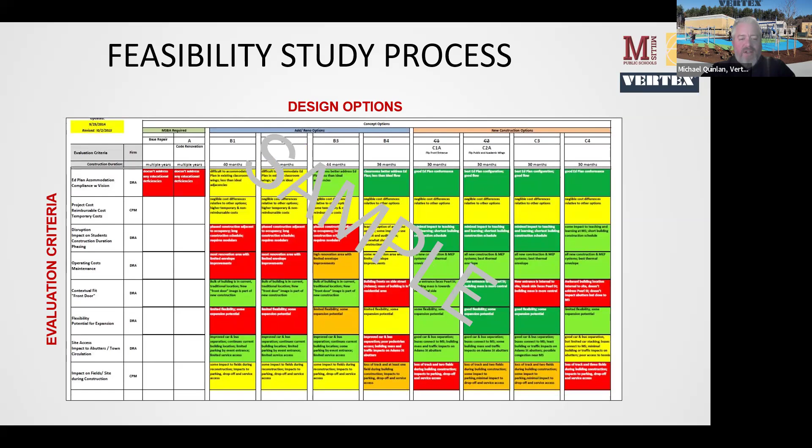We put pros and cons into each of the boxes for each option, or any notes. Then we get a feel for how you feel about it, in terms of which options work the best and which work the least for each criteria. We color code it with a stoplight approach, really sort of a 1 to 5 scale. This gives you a graphic representation, making it easy to see which options are rising to the top—green being the best, red being the most restrictive. As we go through all the criteria, you start to see which ones will really float to the top.

But these are things we're going to ask you to fill out and provide feedback on as we get through the options. Eventually we're going to eliminate options and start to reduce down. Then in the next phase, the PSR phase, is when we select one of those options as the preferred option. Next slide, Charlie.

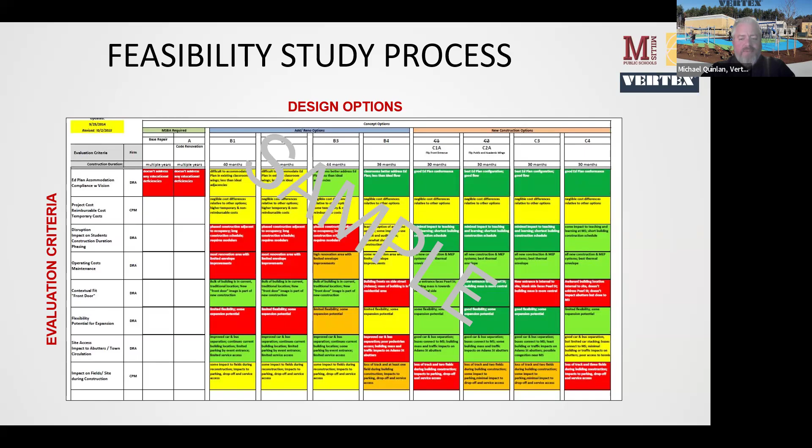The other thing I presented on at the community forum that I wanted to make sure this group was up to speed on was the MSBA process and reimbursement. We're going to get a lot of questions on this, and it's very convoluted, not simple. So we want to be as transparent and open about this as possible.

The MSBA has cost caps. There are certain things that are ineligible. There are certain things that are eligible up to a certain point, and then they hit a cap. So we want to make sure that's clear to the community, clear to the SBC, and clear to any constituent with an interest in this project.

So there are things that are categorically ineligible, like things that are not part of the core educational program, costs for items not part of the permanent building and grounds, and costs beyond the project scope. Two is the caps, which I'll get into more. And then cost for spaces that exceed guidelines, and in parentheses sometimes.

So the MSBA has a space template we've talked about briefly in the past that gives guidelines for what they expect from a typical classroom or cafeteria, and anything over that needs to be approved by MSBA staff if they're going to participate. To prove it out, you need to justify that there's an educational benefit or some operational benefit to the school to justify the added space.

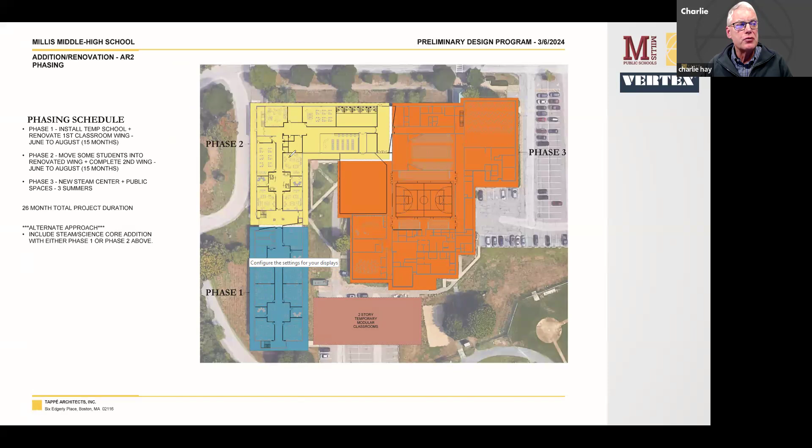Is not dissimilar to the renovation you saw at the beginning, without the temporary classrooms. And the reason for that, again, is because we're really not building any new space. The way to not have temporary classrooms is to really build a bunch of new real estate, and that new real estate we can use as temporary swing space. But when we're building a limited amount of new real estate, it's very difficult to do.

I mean, we are building this one box, but that's not going to fit the middle school, and it's not going to fit the high school. So I think we would end up in this case with some modular classrooms here. So that's the phasing for that one.

Then the next one. Quick question there. Yes, Charlie, of course. Sorry, is that a big expense, those modular classrooms? I imagine they're not cheap, right?

Yeah, so, Charlie, am I correct that's not reimbursable? Temporary classrooms are not at all reimbursable, right? Correct, correct.

Not only is it not reimbursable, the other thing, I think I may have said this at some meeting or other, is it's spending tax dollars on something that you don't benefit from long term. You're just paying for wasted money. You're paying for a temporary facility that you lease, that shows up on a truck, gets installed, and gets removed after 2.5 years. So it isn't a wonderful investment, but in some communities, it's really the only way forward.

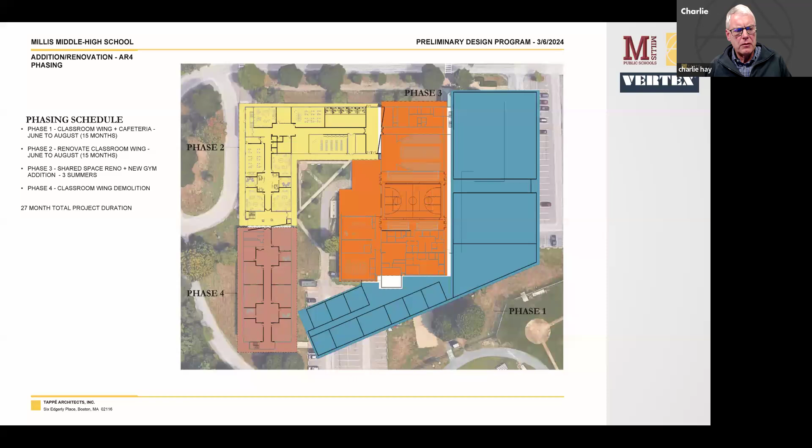And then this one is a sub-version of the last one, because the last one had the gym up in the top corner and a new cafeteria. This one says, well, what if we didn't do a new caf? What if we lived with the old caf and maybe renovated the kitchen to have service on the front, so that we could still maybe enter through there and not be going right next to the service entrance, although the service entrance would still be right smack on the front of the building.

The other one, the nice thing is the service is over in the corner. But put the gym so that it's directly adjacent to the locker rooms, because if you notice in the previous one, the gym was up here, a little bit of travel distance. I don't think it's a big deal, but if it's a deal breaker, this would solve that problem.

But otherwise, it's treated very much the same way. That's why we ended up calling it AR4 as opposed to giving it its own version, because all it is, is the same basic idea, with the exception of not doing a new cafeteria.

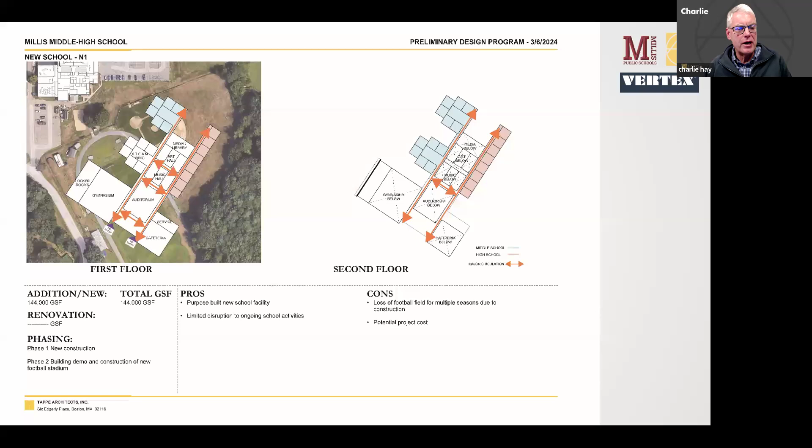So those are 3 new ones. We didn't bother with phasing. The fact is they're all going to be through 2.5 plus years of construction, and some will be longer. The field one will most certainly be longer. If you have a 2-year construction on a new build, followed by 6 months of demolition, followed by 4 months of final site work, you're really talking most of 36 months.

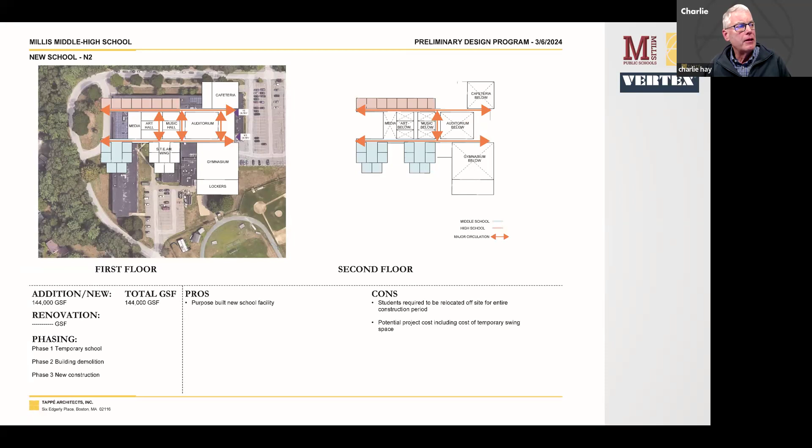And we'd be down probably to 1 new build for advancing into the next phase. So again, we're going to advance into the next phase with at least 1 reno, which we have, and at least 1 replacement, of which we right now have 3. And then as many addition renovations as we think are important to continue to study. The MSBA isn't saying tell us the one you've picked. It's saying just tell us that you focused on it, and that if there are ones you think you can jettison, you've jettisoned. I think there may be, and I'm going to leave that to you guys. I'm not going to lead a horse to water on the addition renovations. I think there are probably a couple of addition renovations that may logically not make the cut for some pretty specific reasons.

But that's it. I got through it in half an hour. I'm happy to answer any questions, and if we want to have a dialogue around it, that's great. I can hopscotch around to different schemes if you want me to.

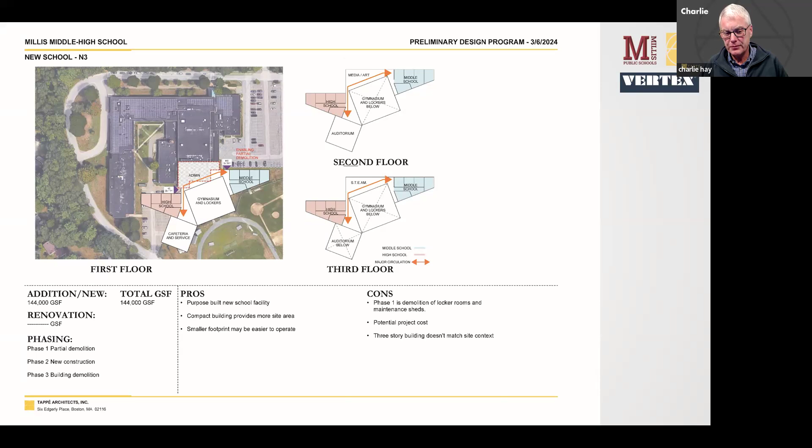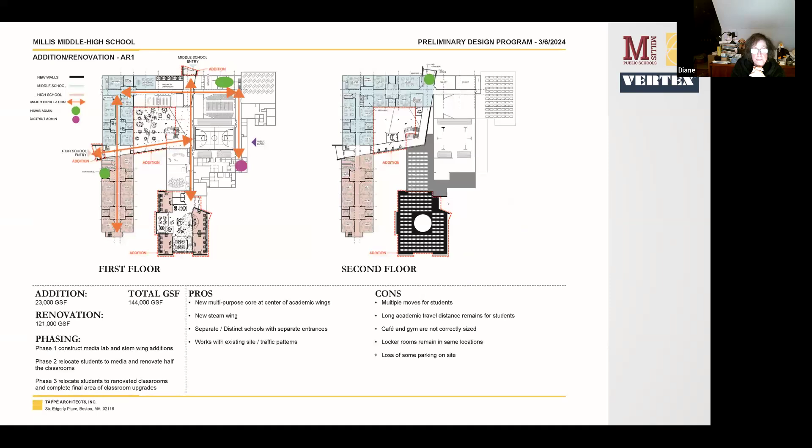Charlie, I'd like to look at the reno ads, excuse me, not the straight reno. So, this is our AR1. Oops, I went too far. There's our AR1. So that's the infill scheme. That's the one where we add.

So this one right now doesn't add any space to PE. It doesn't add any space to CAF, but it does give you a really robust STEAM program. This really would become a community space, which is a desirable kind of feature we were just talking about, so I thought it was worth mentioning again.

And it gives a very robust, large media center. But with this one, the educators really have to weigh in on whether they would deploy these kind of spaces in a robust way. And it creates a new heart to the school, right?

So the school sort of rotates pinwheels around that central zone. I know there were concerns expressed about closing off the courtyard, so there aren't windows. A lot of classrooms, particularly on the upper floor, just look into a 2-story interior space. There are certainly plenty of schools that have atriums, but that may be a concern. And it obviously reduces the size of your existing courtyard.

But it does do some nice things. As I said, it creates a nice multi-purpose zone for academic use, and it creates this central hub. But it also falls a little bit short relative to program satisfaction. So that's that one, and we think the phasing works.

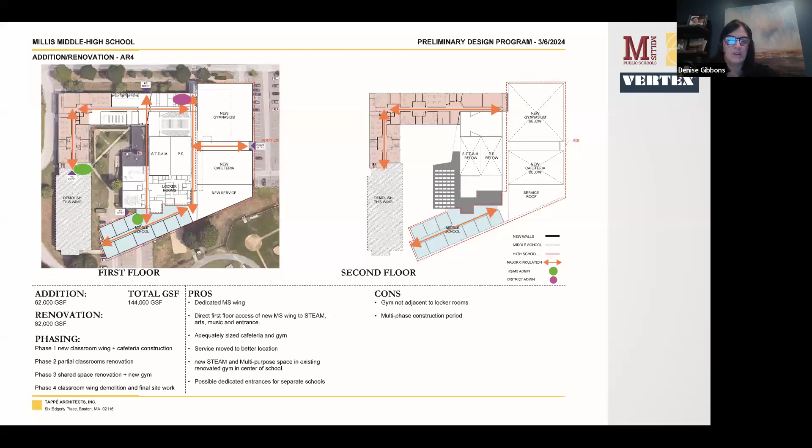Yeah, because I saw some of the earlier ones had science rooms or science labs. So I know this one has wonderful additions for gym and the cafeteria. But I think it'll have enough academic space. We just need to vet that.

Sure, but if we have the right square footage, then we should have the right amount of classrooms. So that's that one. And then this one was just this version of the other one, except without a new cafeteria. I think the good part of it is that we do less new construction. The bad part is that the cafeteria is slightly constrained.

And then the other issue is that if we wanted a community entrance here, we'd have to completely rework the kitchen, and we'd end up putting service on the front of the building, which is not particularly attractive. So there's some complexities there, but it would give us the opportunity to just do a gym and not worry about the cafeteria.

So it's a menu, right? It's looking at different choices.

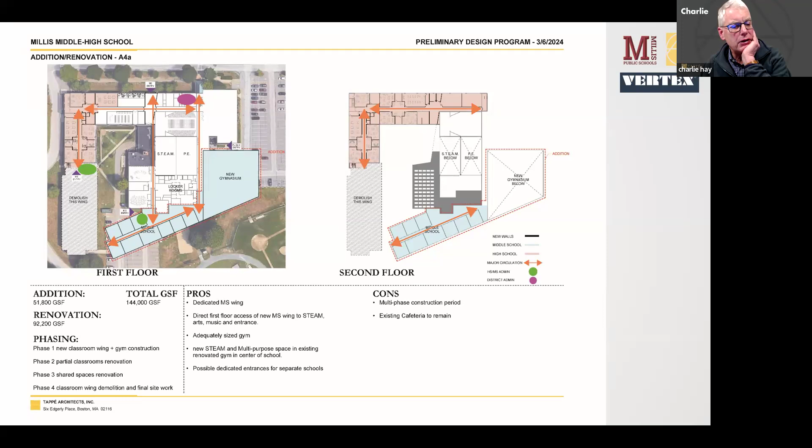Yeah. Neither one of those options would require temporary modulars. I think the only ones that have modulars are the ones where we're not building much new, because we're using the strategy of building a bunch of new and moving kids into it, and they become our swing space. So the ones where it doesn't really work out are the ones where we're not doing much new.

So that means AR2 is a little bit too tight, I believe. We're not building enough. We build four science classrooms and three or four STEM rooms. Maybe we could get the middle school in there. We're never going to get the high school in there.

We might be able to pull it off with only a few modulars. And then AR2, yeah, AR2 is the only ad-reno that we seem to think we are going to need some mods to make it work.

Charlie, can I ask you a question about the renovation component? When you say renovation, I don't mean the first one where we're just putting in new wiring, I mean really renovating — does that mean you're gutting the floor and rebuilding it to be the right size?

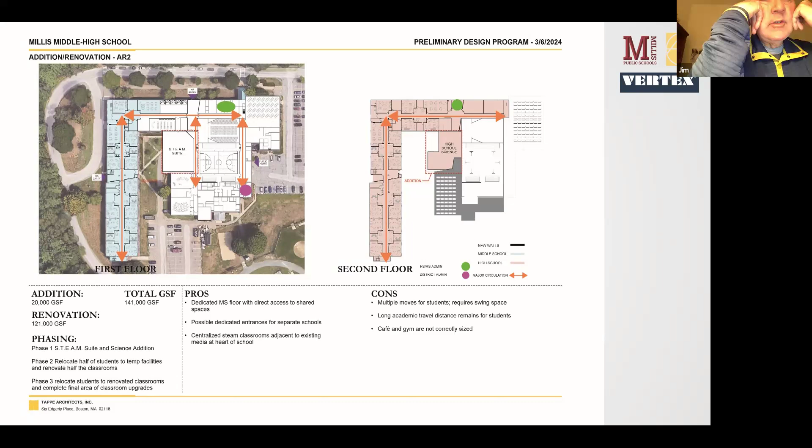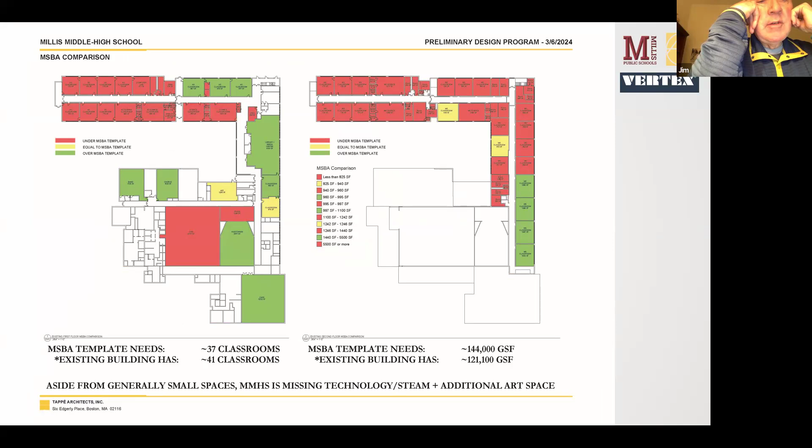Yes. So help me, because this is where I'm starting to get a little bit confused, and maybe others on the committee can correct me. I think there may be a feeling in the community that a really genuine renovation project, to make this whole like what it should be, is a lot cheaper than building new. And what I'm hearing you say is that's just not the case.

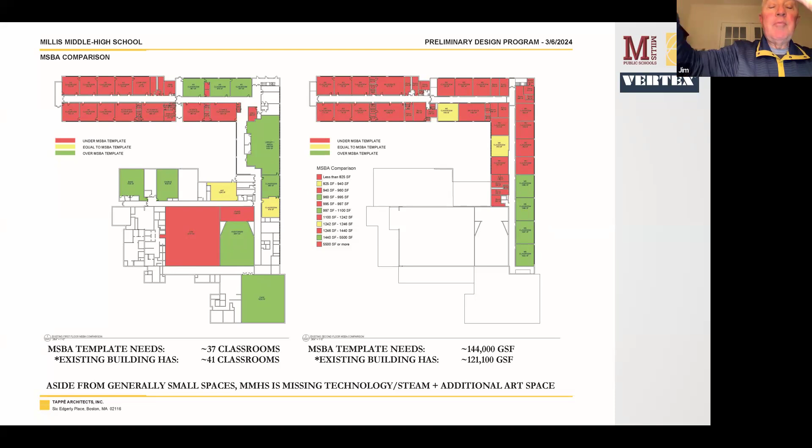I don't think that the new options will all be more than the renovation addition options. I don't mean the brand new school, but new construction on new additions versus renovations on the same building. It is perfectly possible that they will be similar price points. We just don't know yet.

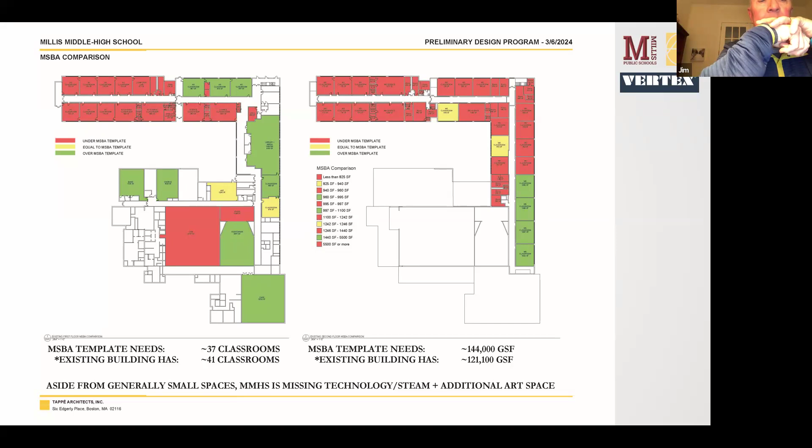We don't know, but it's not going to be half. No, to renovate it's not going to be 50 cents to the dollar. Not even close. I guess maybe some people think that's what's going to happen, but yes, we get that all the time — like if it's just significantly cheaper to build a renovation project, and that's just not the case.

No, I mean, if you go back to Clyde Brown and look at the early budget numbers there, it would bear out this analysis. So you look at that diagram and you just squint your eyes and you think that's a lot of red.

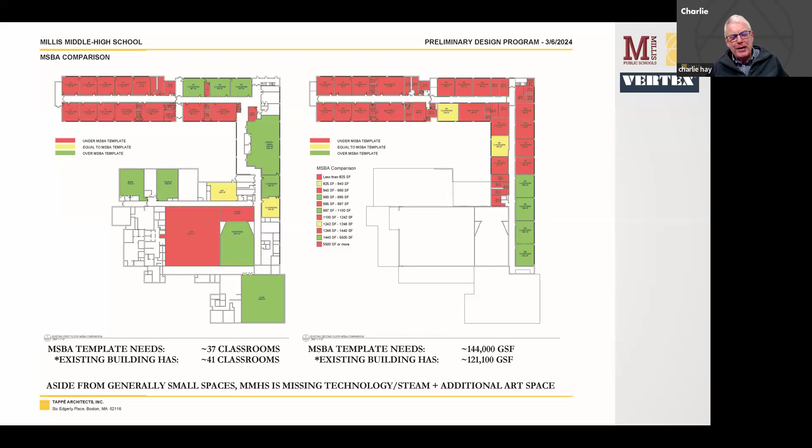They don't go green until we move all those walls, so that means we're going to be moving a lot of walls. That doesn't mean we can't use the floor plate, it just means we're moving a lot of walls to make it all work.

That's why we're doing this whole thing. Our goal is to try to be as effective as possible, and to do that we have to walk through the process.

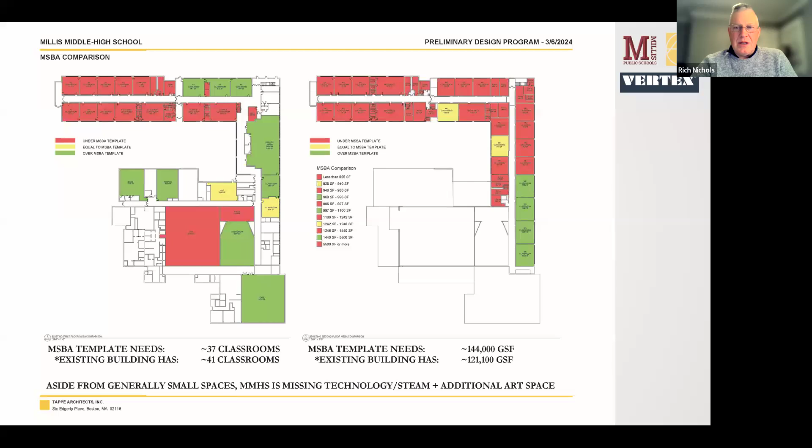I think we'll know more when we see some budget numbers, but I'll warn you, the MSBA right now, we can't possibly develop accurate costing at this stage. We have little diagrams here. The cost estimators are going to take those diagrams and look at historically what we know about the marketplace right now, and we have an excellent estimator.

What we know about the marketplace is this kind of work is probably running about this, and they're going to apply that to the square footage. They are not doing a formal full-blown estimate. They can't. So the whole thing is going to be kind of rough, and they're going to put huge contingencies on everything, and a lot of hedges.

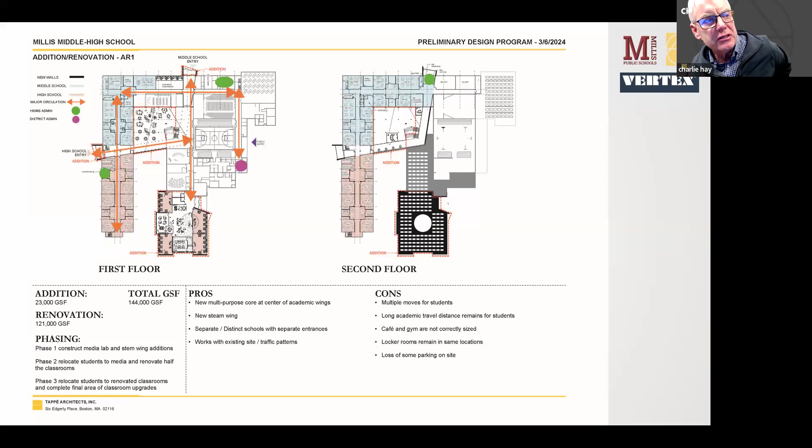So I would caution against too much faith in the early numbers. I have a lot of faith in what PM&C does because they're excellent people, but they're not real estimates. They're not going to be truly real estimates till we get to schematic design, which is when you make your commitment to the MSBA in terms of what you're doing.

But I think by the time we get to the end of the PSR, the preferred schematic report, and you all pick an option, we will have a much better idea of numbers. For comparative purposes, it's a really useful exercise to take all these diagrams and say, well, this is probably in the range.

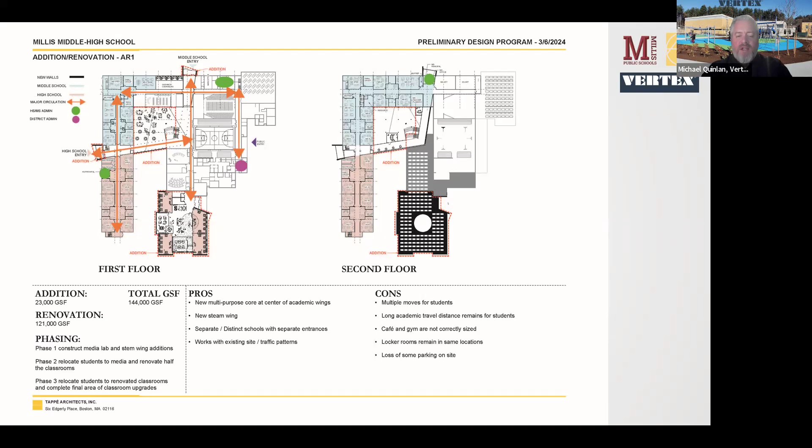I don't know if Michael agrees, but we generally present them as ranges. We say option 2 is X to Y. At this phase I don't have an issue with that because it's purely conceptual, and we haven't drilled down yet into details to really be able to define it. So you have to give yourself a little bit of flexibility.

What you kind of want to do is say, well, this one is one dollar sign, this one's two dollar signs, this one's three dollar signs. In other words, that's the most expensive one, that's the less expensive one. That's interesting data. But you don't want to say, how come this one is nine more than the last one. So I don't see any that are single dollar signs here.

There are no single dollar signs. There are no school construction projects in Massachusetts with single dollar signs.

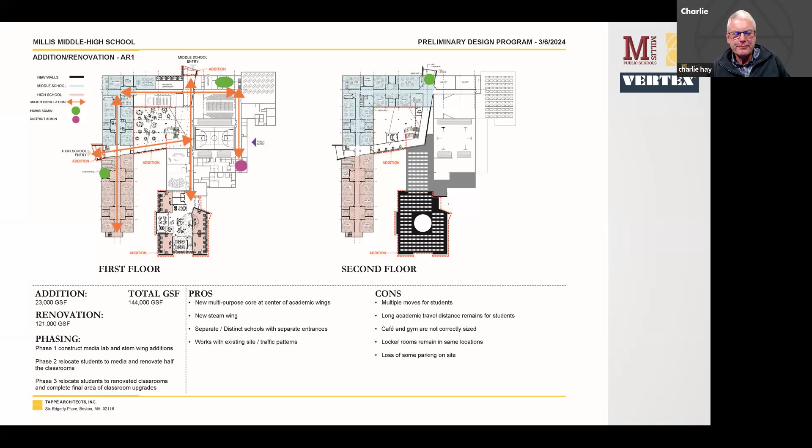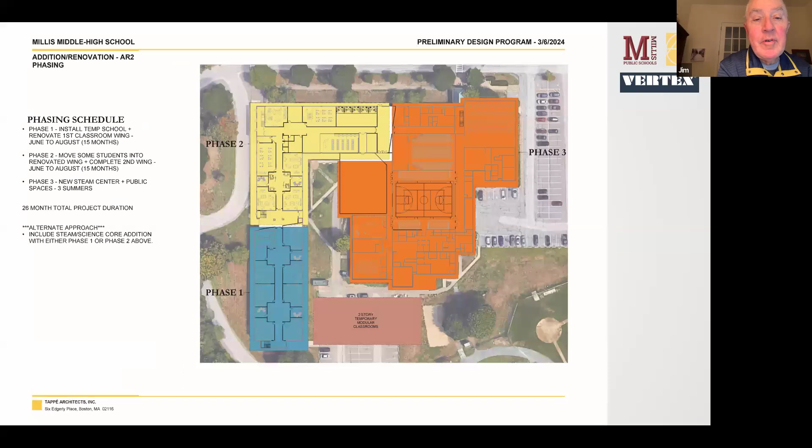I wanted to ask if it's appropriate, because I think this helps us get somewhere, for the educators to tell us a little bit about why they might favor a plan that really separates the middle school and the high school, creating something like AR3. Is this really something we should pursue, or is it not as critical? Because some of the other plans continue to overlap, where there's middle school and high school kids on the same floor.

That's a good question. Well, Diane or Mark? I would say, speaking for myself, a high school and a middle school are two different philosophies. The middle school is set up in teams, grade level teams, with a team of teachers—the same teachers teach 6th grade, a group teaches 7th grade. It's a unique setup. High school is set up by departments. So I think building those separate wings can lend itself to each of the different setups.

Also, right now we have middle school and high school kids on the same floor. I don't want to speak for Anna and Mark, but it's not ideal. We don't have a lot of problems that happen between the high school and the middle school, but the potential is there, and I think separating helps there as well.

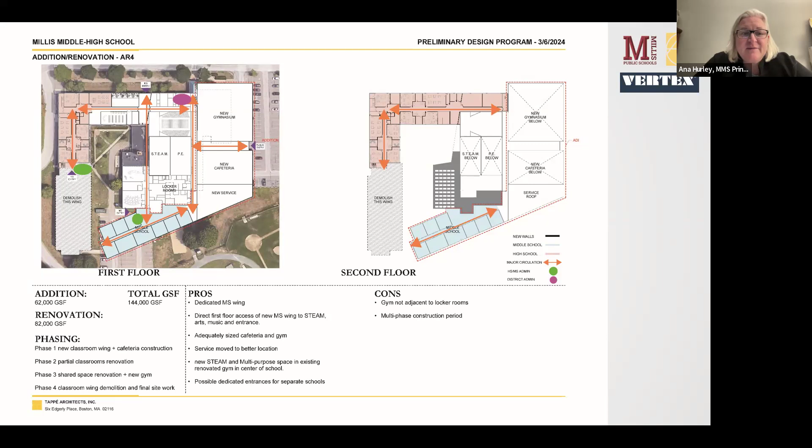I think you both kind of nailed it on the head. There are certainly some developmental differences between the grades, and like you mentioned, Ana, you have 11-year-old kids in the building and 18-year-old kids in the building. Like Bob said, we're very fortunate that we don't have a lot of challenges with that, but it always sets itself up for that possibility because we have so many shared hallways and spaces. It would be nice to be able to separate things out where our shared spaces truly were the places where the kids mingled, yet we still have opportunities in our buildings to collaborate, because we do get to do some peer mentoring and things like that with the middle school.

That is great because that is unique to our district. We have 3 schools within a pretty close radius, and it's very easy for our students to interact in different ways with kids in the different buildings. But our rules in the buildings are different, our cultures are different in each school. Over the years, and having been here for my 17th year now, you could see that need has always kind of been there, and having the opportunity to potentially address it, I think would be incredibly impactful for both schools and for the students and families in the town. So that would be my 2 cents too, but I think you both nailed it.